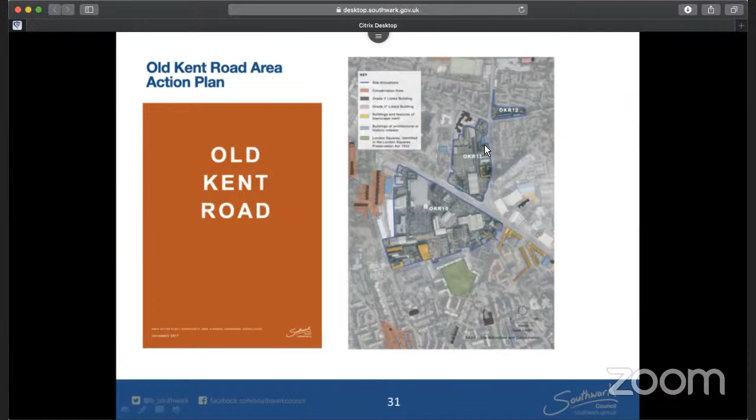As you would know, the proposal is found within the Old Kent Road opportunity area designated in the London Plan. The site is located within site allocation OKR 11, Marlborough Grove and St James's Road of the Draft Area Action Plan, and it's quite central to the allocation, being located along the middle of the eastern edge. The plan to the left is an extract from the Area Action Plan showing the master plan and the change that is expected for this area.

The site is located within the Old Kent Road Strategic Protected Industrial Land, but in this case, the principle of the land use as residential has been established through the permitted development and the subsequent permission. The proposal is consistent with the AAP, which doesn't envisage that any industrial uses will be provided on this site.

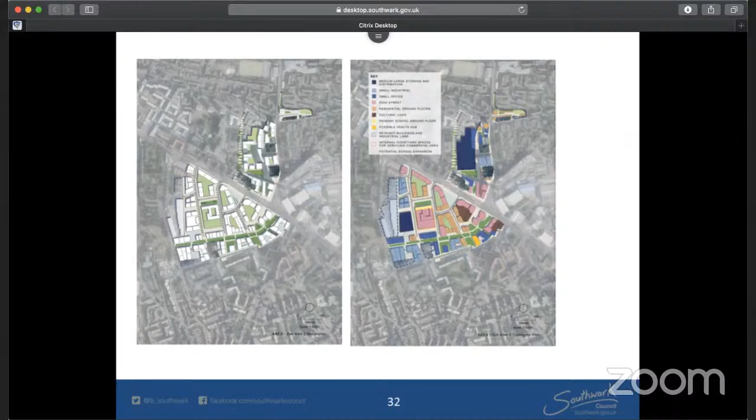Focusing back down onto the site we're looking at this evening, the proposal under consideration is for a scheme which would deliver 15 new homes through an upwards extension. This is accompanied by a number of associated works, including landscaping and cycle strategies, which will be discussed in more detail as we go further along in this presentation.

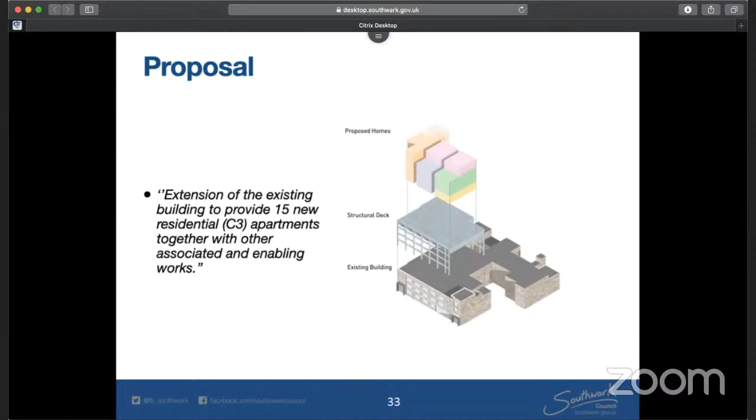At this stage, it may also be worth highlighting the modular build nature of the scheme, which in part allows for the quality of the residential units, but also offers the benefits of less on-site construction time and a better performing building fabric.

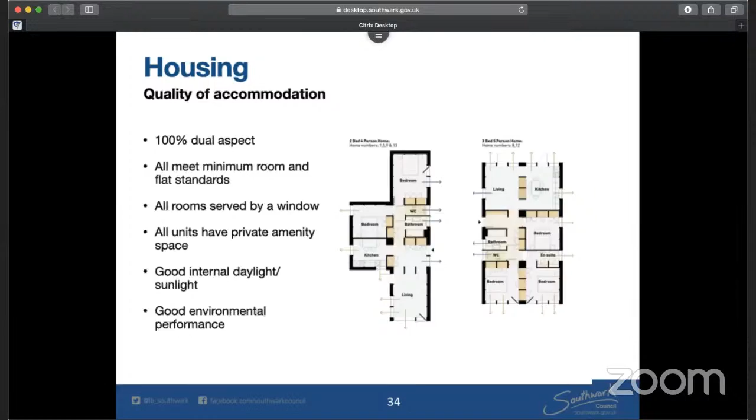The next image shows a typical floor plan layout and how the proposal would sit within that rooftop space and arranged around the existing skylight.

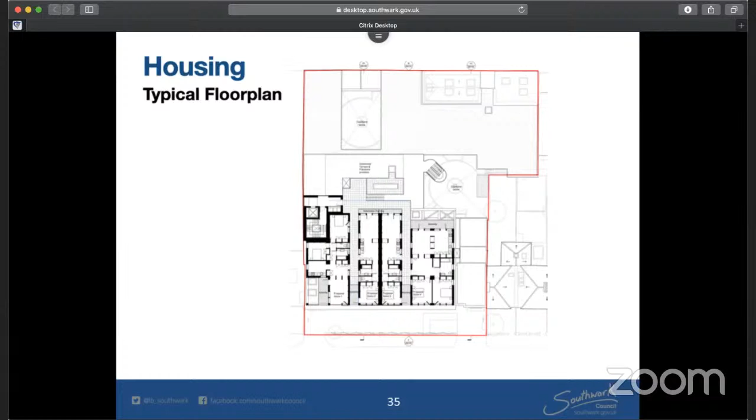In addition to the private amenity space, the scheme would also deliver new policy-compliant levels of communal amenity space and play space. The report goes into detail about the provision, but to summarize, the space identified specifically as communal is in excess of the policy requirement, which on this site is particularly welcome given the lack of existing amenity for the Chevron residents, and particularly that these will be made available to both the existing and the new residents. The image on the right-hand side shows where all those different spaces would sit.

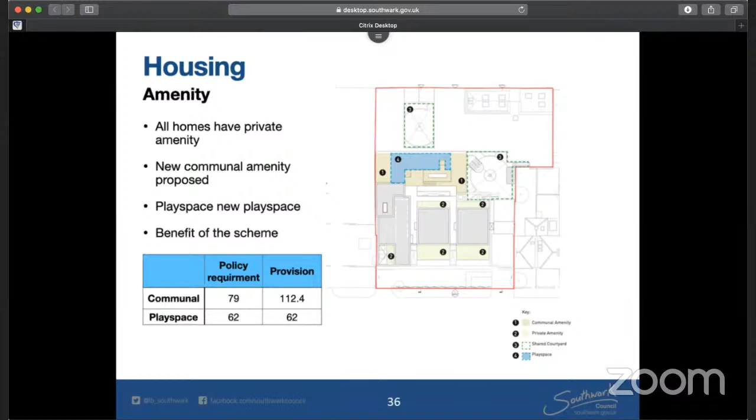Of the 15 units, 38.1% as measured in habitable rooms would be affordable, which in unit terms translates to 4 affordable homes. Although this exceeds the 35% minimum, all the units have been proposed as intermediate, so it falls short of the required mix of the policy. The viability that accompanies the application has been subject to a very detailed review by the Council's advisors, and the current mix on offer is the most that the scheme can support.

The scheme initially submitted saw the 4 intermediate units being for shared ownership, but this is now being proposed as London Living Rent, which would contribute to the Council plan commitment for the delivery of 1,000 London Living Rent homes by 2022. In addition, the applicant proposes that all of the units will be offered to key workers, the definition of which is the one that was reported to Cabinet on April 7th of this year.

The next slide shows the scheme's evolution and how the proposed massing has allowed for these various amenity spaces to be created, with the consolidation of the heights towards the portion of the site fronting St James's Road.

Daylight and sunlight assessment has also been provided, which is set out in the main officer report. This demonstrates that there will be some deviations from BRE guidelines, but which are considered to be minor. A similar exercise has been undertaken against the conditions of the extant scheme. These show minor variations, which are also considered minimal when using the extant scheme as a benchmark, and are outweighed by the benefits of the scheme.

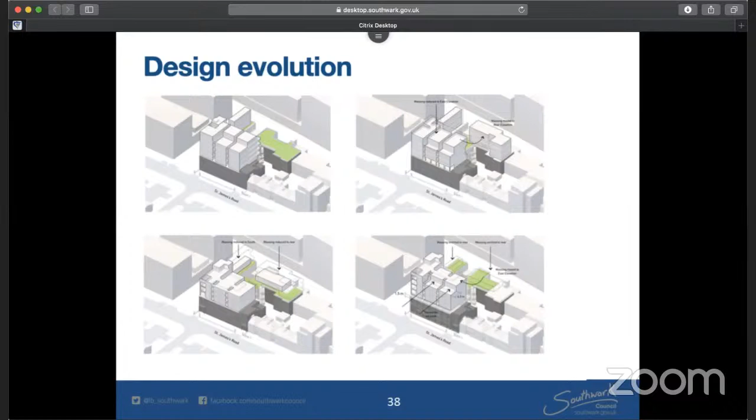In terms of height, we're looking at a Part 3, Part 4 story addition, which would result in a Part 6, Part 7 story building. This slide just shows how the massing would sit within that resulting streetscape.

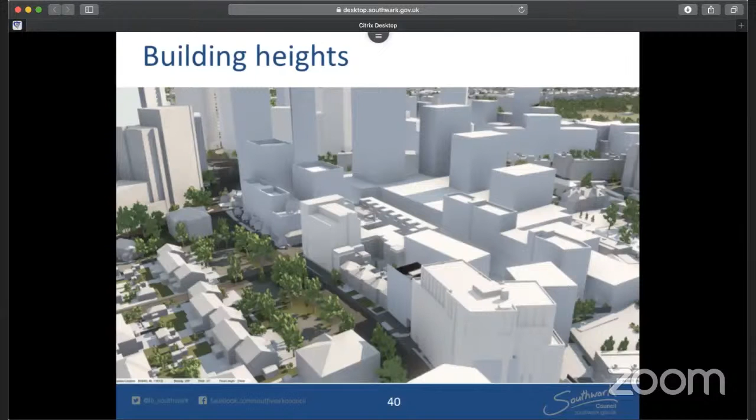The proposal follows the guidance in the AAP and the stations and crossings policy, which states that a Tier 1 building could be located at the junction where St James's Road meets Old Kent Road, but that along this portion of St James's Road, where the site is located, the AAP states that buildings of up to 8 stories would be acceptable. The next slide shows how the resulting building would sit within that emerging allocation, following that hierarchy of heights within the AAP.

The detailed design of the scheme is of high quality. It incorporates a modern element to the existing brick building. The proposal is for a simplistic metal palette with muted concrete frames, which members will remember was previously steel. The frame is structural, but it has been designed to frame the existing windows and to carry down the rhythm that is set on the upper levels to the ground and allows the integration of the two elements.

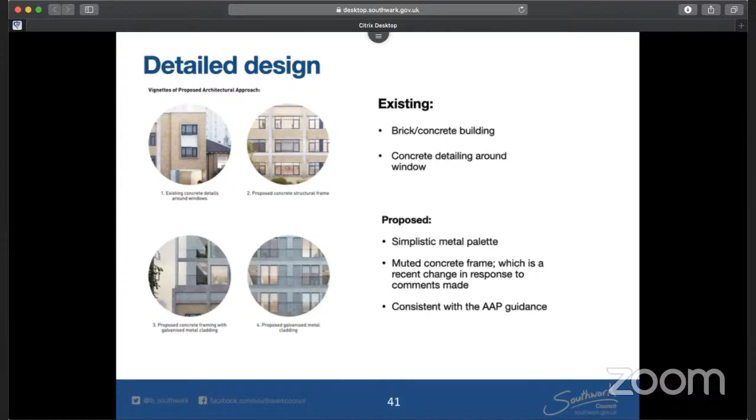The detailed design strategy picks up on some of the existing materials, including metal and glass elements, which characterize this area. The image of the glass is of the Phoenix Primary School, which is the closest building with a formal listing designation and which is located about 19 meters away at its closest point from the application site. The image on the left-hand side just shows how these materials are carried onto the detailed design of the elevation.

This strategy again is consistent with the AAP, which requires development to be designed to reflect the functional and industrial uses of this allocation, using materials such as brick, concrete, and a natural colored metal.

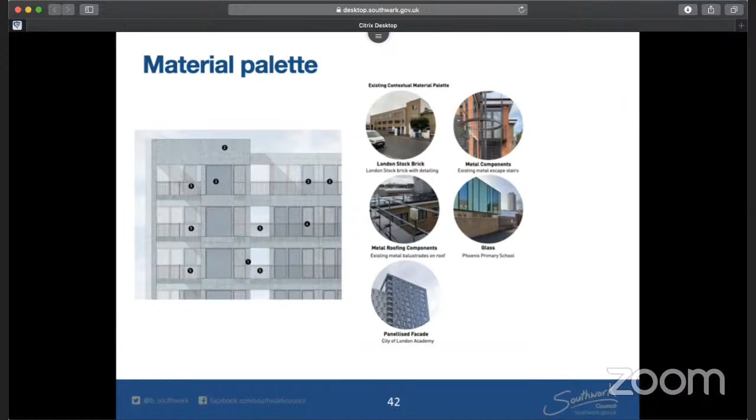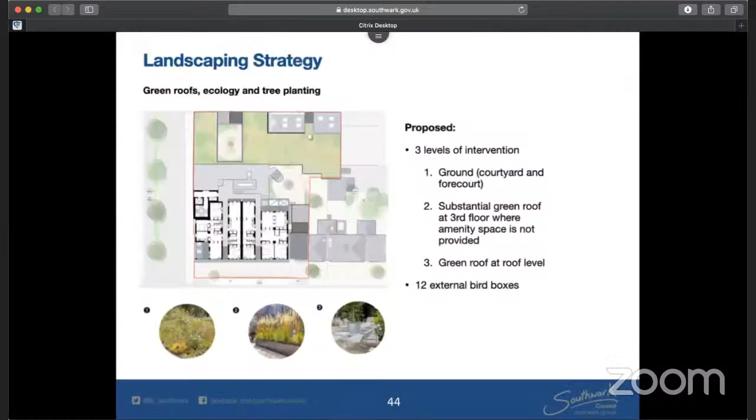This is a car-free development. The initial application saw a strategy with additional bicycle storage to the front of the building, where we received a number of representations regarding the location of the cycle storage, and the applicant now proposes the consolidation of the existing store and the courtyard rack to accommodate enough parking space for new and proposed residents of the Chevron building. Similarly to the waste management strategy, which would follow the existing arrangement, and both would be secured by condition.

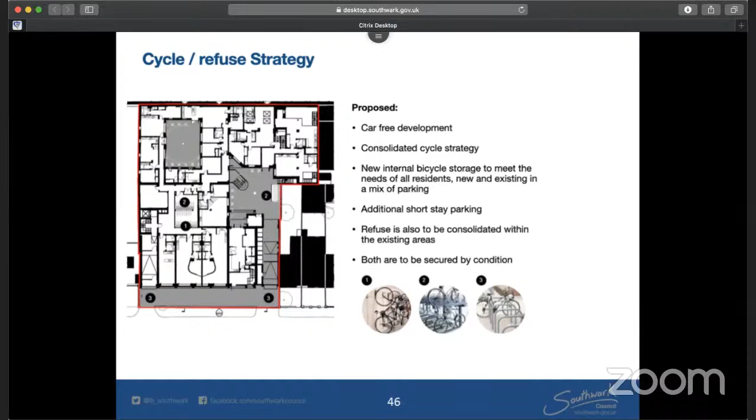Finally, to conclude, is a summary of the proposal. The proposal would deliver 15 new homes, 13.1% of which will be affordable, and that includes 4 London Living Rent homes. The quality of the residential accommodation is considered to be excellent, in addition to all of the communal and play space that the scheme is able to meet.

There'll be new cycle storage and bin storage for all residents, which is secured by condition, as I said. And a connection to SELCHP has also been secured. The proposal is modular build, again, to reiterate, reducing the on-site construction. And the scheme would also result in substantive biodiversity and greening onto this site.

When all matters considered, the recommendation before you this evening is that planning permission is granted, subject to the conditions in the report and addendum and the completion of a legal agreement.